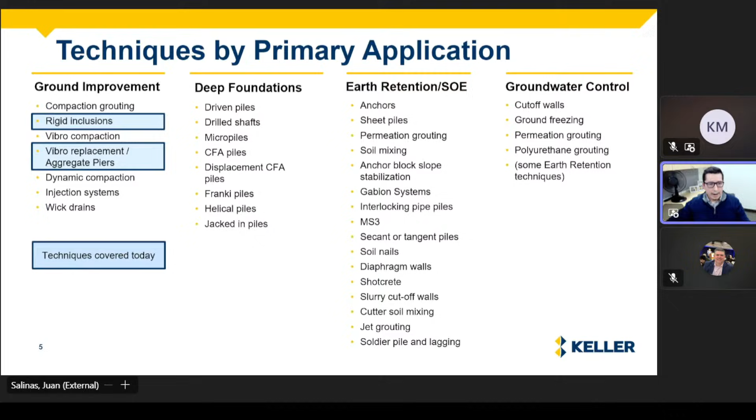So ground improvement refers broadly to techniques that increase your soil bearing capacity and reduce your settlement, letting you design your building as if it were on shallow spread footings. It kind of simplifies the structural design side of things and saves you money because you get smaller footings. These are just some of the typical characteristics of the two products that are the focus of today's presentation. Hopefully most of you are familiar with at least one of these products. They're great for supporting tanks, buildings less than about 12 stories, although Keller has gone higher than that, parking garages, embankments, MSE walls. They're very versatile products, installable in a wide range of geologic settings.

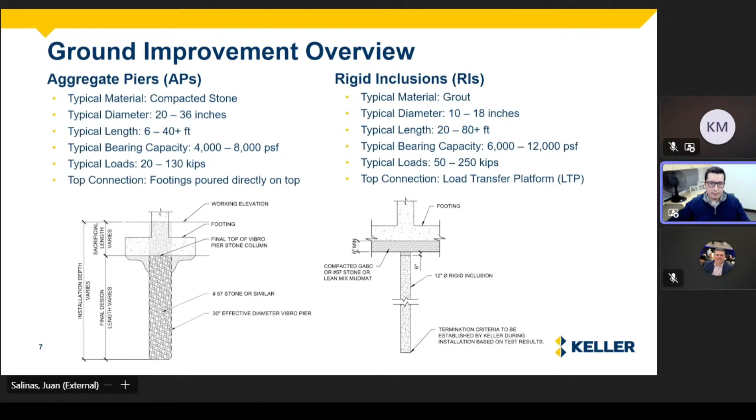I think the most important thing to understand about the mechanisms by which these two techniques improve the ground is that aggregate piers share the load with the ground, and they work with the surrounding soil matrix to improve the engineering parameters. But they rely heavily on that soil to offer pushback and the confinement needed to develop that stiffness as you install them with tamping or vibratory energy. This makes them not suitable for very soft soils or organic soils.

Rigid inclusions, on the other hand, are much stiffer and transfer the load through the soil layers. There's still some load sharing there, but it's less due to the higher stiffness. They're kind of like CFAs, right? Without reinforcement, they're much more like piles in many ways. They are piles, but they're not connected structurally to the building. So you need a load transfer platform, and you need a finite element analysis to understand that interaction between the piles, the LTP, and your rigid inclusions. So there are structural considerations to be mindful of there. But I'll note that the LTP doesn't necessarily have to be any one thing.

It really just refers to the material that occupies the space between the top of your RI and the bottom of your footing, and it can be relatively thin, it can be thick, it can have grid reinforcement, it can be made up of different material types. So it really depends on the application. One of the risks would be that because it doesn't have reinforcement the majority of the time, it has pretty low lateral capacity. It's not ideal in seismic settings, but it can still be installed there if you reinforce it.

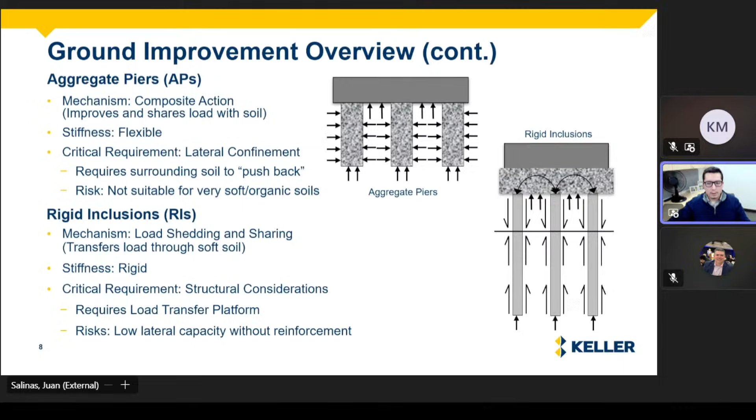Into some stuff, this is the section that hopefully most of you guys are pretty well versed and familiar. But the reason I've included it is just because I get to see a lot of different reports through different areas of the country, and they're not all created equal, right?

So I think first and foremost, we want to understand and identify the geohazards. We want to carefully review the geology information. It's critical that we understand where we are installing ground improvement, and the more data we get, the less risk, right? This is something I'm sure we're all on board with. We really need to think about the number of tests and the depth of testing with respect to the structure footprint and the depth of stress influence, right?

I mention this because I've seen reports where we're doing 15-foot or 20-foot borings for maybe a 5 or 6 story structure, and then we're terminating them in 2 blow silts, right? We don't want to be doing that. That's not particularly helpful. We should consider training our drilling teams, our field engineers, to maybe dynamically adjust our explorations to gather the appropriate amount of information so that we have success with these projects.

And then soil variability, right? Sometimes your footprint is rather large, and I see project reports with only 2 or 3 borings in that building. 2 of the borings maybe are showing pretty consistent conditions, and then you have a third that's showing a dramatically different profile. I think that project probably could have benefited from some additional testing in that transition zone to really understand what is happening on that particular project.

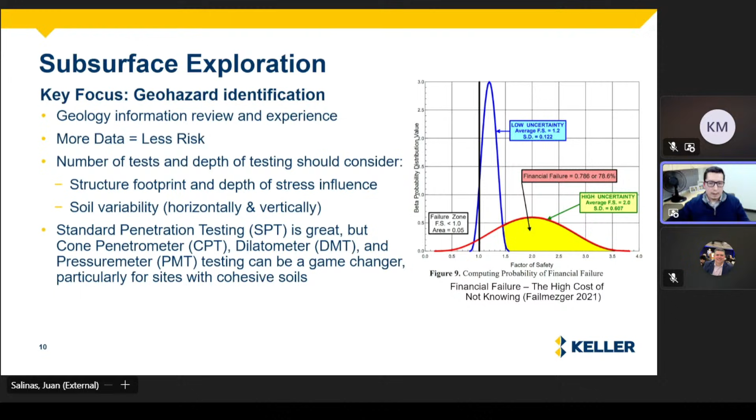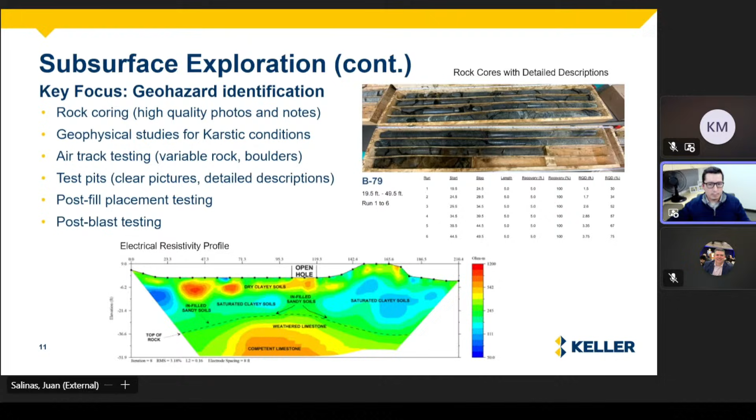This slide just has a couple of more specific types of testing that we would want to do for certain job sites, right? Things like rock coring, geophysical studies, air track testing, karstic conditions and limestone, having really good photos, clear pictures, detailed descriptions. These are paramount to having a successful outcome and an optimized design. We'll see in one of the case studies why I mentioned these things. And things like post-fill placement testing and post-blast testing can also make a substantial difference.

Lab testing, our focus here should be on understanding soil behavior and composition, right? Atterberg limits, moisture contents, grain size are relatively inexpensive ways to gather some pretty good data, to really supplement that information you're gathering from your SPTs. But you'd be surprised how many reports I've seen come across my desk without a single lab test of any kind. I'm talking not a single moisture content. It's kind of shocking because we should all be aware, hopefully, that not all clays, silts, and sands are created equal, right? Even those with equal N value.

And that could be a result of their composition, but also things like their stress history. Testing really needs to be performed at critical layers, which are often found deeper. I have found in my practice, oftentimes, for whatever reason, testing seems to be very concentrated in the upper 10 feet of soil. But sometimes the most important layers to analyze are kind of deeper down. So if you find some weaker layers deeper down, those are good spots to check them.

Things like consolidation tests, direct shear, triaxial for ground improvement—these can make or break a design.

And obviously organics. What I see a lot is qualitative descriptions of organic content—things like this boring has little organics, or some organics, or trace organics. What we'd love to see is a more quantitative approach, because generally speaking, once you cross about 5% organic content, you start to wonder if aggregate piers are even viable for this project. So I'd encourage you guys to do loss on ignition testing and keep in mind that some of the qualitative descriptions may not be as helpful.

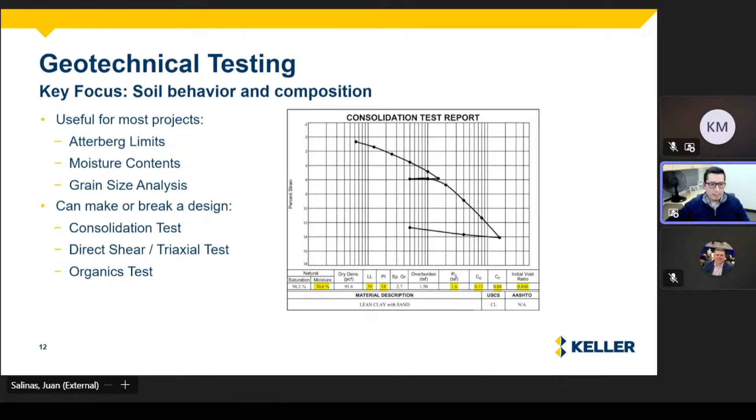I have one slide on structure and design that packs a lot of information, with our focus here being on soil structure interaction and the requirements.

Same thing happens for retaining walls—you need to understand the heel and toe pressures and how those will influence the ground.

The other really important thing is to understand overlapping stresses. There was a project we looked at with very large tanks, 100-something diameter, situated in a line and spaced about 15 feet apart edge to edge. If you plug that into Settle 3D, you'll notice the center tank settles substantially more than the other two, and those two will have some tilting action, with more settlement on the side adjacent to the center tank. That's because of these stress bulb influences. We need to understand that and figure out the impact on anticipated settlement. So that's something to think about.

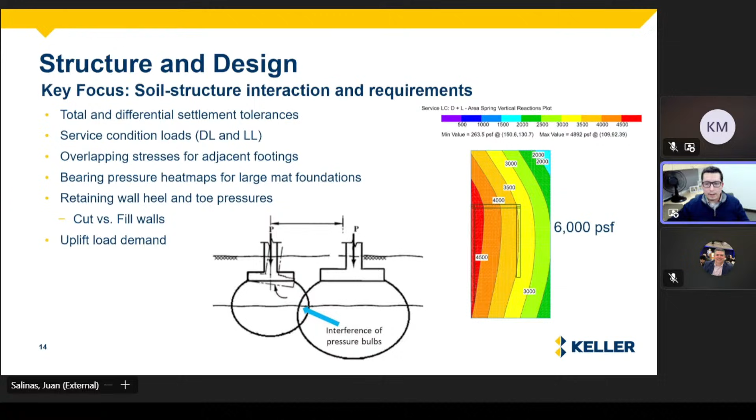With respect to uplift load demand, we don't see these very often for ground improvement. In the limited cases we have seen them, it's worth initiating a conversation with the structural engineer to really understand the requirement, and whether that uplift demand is real or actually a true net uplift demand. We should at least ask the questions.

A couple slides on construction and quality control. Our focus here needs to be on understanding the true site conditions when we go to installation, and keeping communication between all parties involved.

I think a good starting point is your working pad. This has implications even at the design level, and cost implications. Is it one elevation? Is it multiple? Is it sloping? What do your transitions look like? This determines whether our equipment can navigate it safely and efficiently. It also has implications for cost and delaying schedules if it's messy, and we may even shut down if it's too unsafe for our equipment to operate.

So we need to keep it dry and consider using soil cement if you're expecting a lot of rain, things like that.

The other big thing is, we do a lot of work in data centers, and utility coordination is paramount. Having meetings, and the earlier that we start communication about this subject, the better, right? We have a lot more options.

With piers, utilities, and footings, they can be relocated, resized, eliminated, raised, lowered. We can also change the construction sequence, install them first or redesign them, use alternate materials to limit that dig zone you see - it's quite substantial, right? This is a little bit different again because these aggregate piers are going to rely on the surrounding soil for that confinement. We need to limit how excavations are performed in the vicinity of those, which is a little bit different than something like a deep foundation system, right?

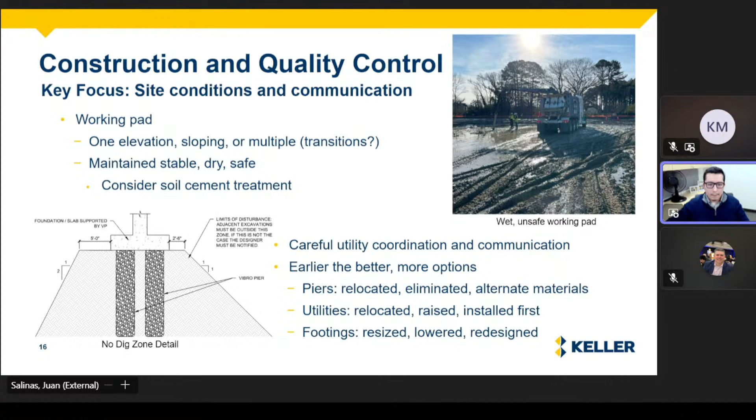The other thing is element installation and tracking, right? So your installation length is equal to your design plus your sacrificial length, and we need to track that carefully. We need to understand, with respect to your working platform, what is that sacrificial portion of the pier that gets dug out as you excavate for your footings - it matters, right? We need to account for that and track it well in projects, especially where you have shallow rock.

That needs to be understood because your design length might be fully compliant with the design intent, even if the pier terminates short of the anticipated elevation, right? We see this a lot in Northern Virginia projects where our design will specifically state that we've accounted for conditions where our piers are going to be slightly shorter than intended.

But oftentimes we find that these get flagged as non-compliant by either third-party reviewers or site inspectors when they're made. So I just encourage everyone to make sure you read through the entire design documents to understand what these specific requirements are there. And then having redundancy really helps with tracking, because we've had cases where our tracking documents will show something different than what the inspectors have on their notes. So redundancy can help alleviate some of that friction.

One of the most important things, and this will be touched on in one of the case studies, is footing subgrade preparation, right? Probing it for stiffness, visually inspecting it, making sure it's dry and well compacted, and then protecting the excavation if you're going to leave it open overnight with a mud mat. Just following the notes on the design and having clear high resolution photos and field reporting. Again, because the piers work and...

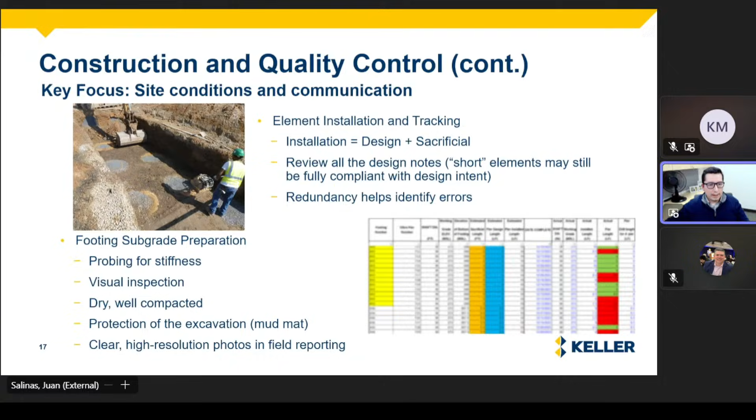Rely on the surrounding soils, it's not enough to just have them, right? That soil matrix could become compromised even if the piers are there, right? So it's important that we take a look at what the footing subgrade looks like when we go to pour the footings. So now we get into the case studies.

The first one is an elevated water tank project here in Virginia. This is in Piedmont geology, kind of along the fall line, which is the transition between Piedmont and coastal plain soils - so your residual versus your coastal deposits. On this project, you have residual sandy silts over partially weathered rock. You'll see a profile on the next slide.

And we're supporting a 1 million gallon elevated water tank designed for 5,000 PSF. This had typical settlement criteria of 1 inch total and 1/2 inch differential, but that should catch your attention, and we'll see why in a minute here.

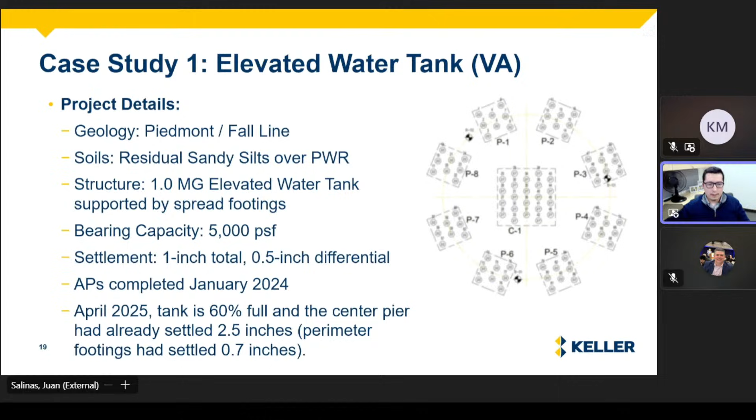This is kind of what the layout looks like. You have a center pier with a 24 by 24 footing, and then all the perimeter footings are about 14 by 14. We completed aggregate piers on this one in January 2024. And in April 2025, the tank is filled 60% full, and the center pier has been measured to have settled about 2.5 inches, although the perimeter footings had only settled about 0.7 inches, give or take.

So this is the soil profile. Here's about where your bottom footing is. Nothing particularly concerning if you just take a glance through that. The N values are not that low. These are 30 to 40% sand, silts.

And the geotech analyzed and made some settlement predictions of totally unimproved conditions, assuming about 1,000 kips. This is higher than the actual loads. I think the actual loads were somewhere in the neighborhood of 900 kips for the perimeter footings and 2,800 kips for the center footing, with settlement predictions in the neighborhood of 1.4 to 1.8 inches, which was pretty congruent with our initial analysis as well.

We also performed a modulus test for the project that showed less than half an inch of deflection at 150% of the load. The perimeter footing settling, 0.7 inches at about 60% of the load, was almost perfectly in line with our expectations.

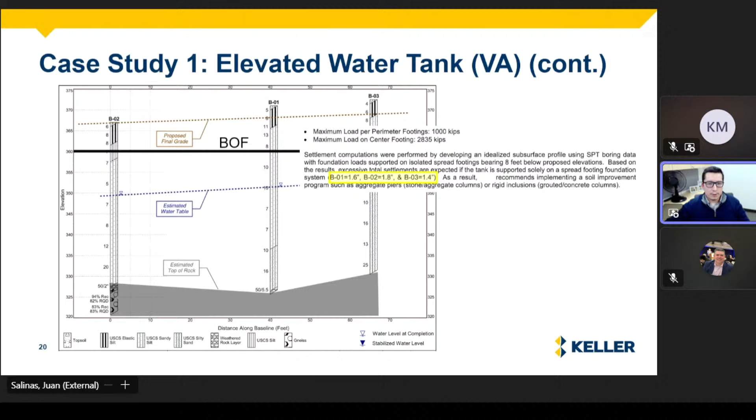So we weren't sure what was happening here. Here's a photo of the subgrade before they poured the footing. It's the only photo available, but to me it doesn't look great at a glance. The photo's kind of blurry and grainy and hard to see. The lighting's not great, but it looks a little bit wet, not exceptionally dry or flat. And the silts in this area, like most silts, are extremely moisture sensitive, right? They lose a lot of their strength when exposed to water.

So we reviewed their records from the inspectors, and there were some missing reports and errors that made it unclear exactly what happened, but they suggested the excavation may have been left overnight. Historic weather data review didn't necessarily suggest a rain event took place, but it was hard to tell.

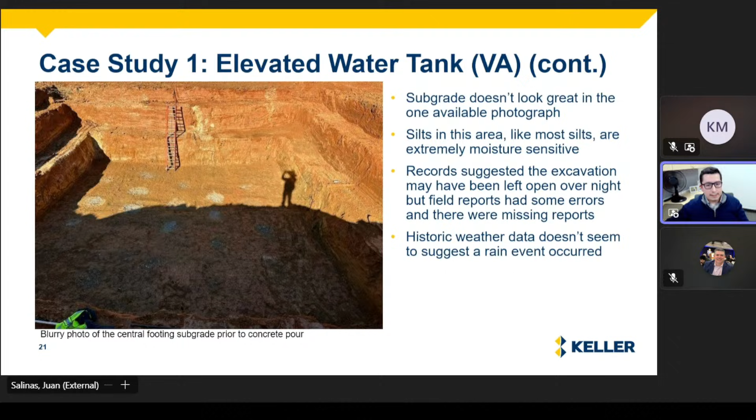So some important lessons learned there. Actual settlement tolerances, total and differential, were somewhere in the neighborhood of 3 to 4 times higher than we were initially told. We found this out over the course of figuring out what the risk is. They ended up having to drain the tank, change the piping connection, jack it up, and then reinstall it. Ultimately, I think all told, the tank ended up settling - the center pier settled something in the neighborhood of about 3 inches, with the perimeter footing settling about the 1 inch we predicted. So a total differential of about 2 inches, and ultimately it was fine with that.

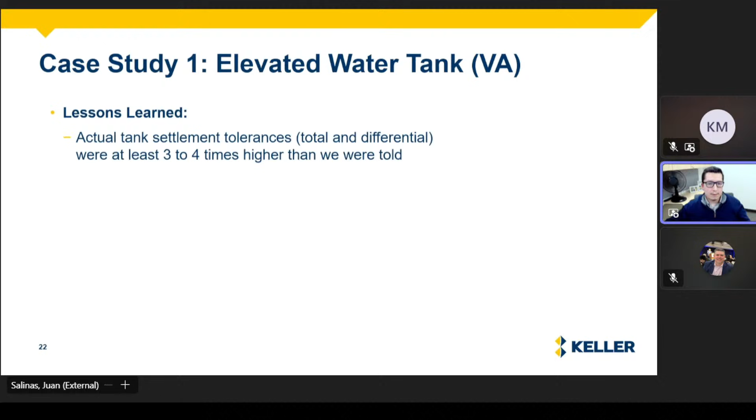So this is what I envisioned the structural engineer might have looked like after he told us that settlement was only 1 inch, or it could only be 1 inch.

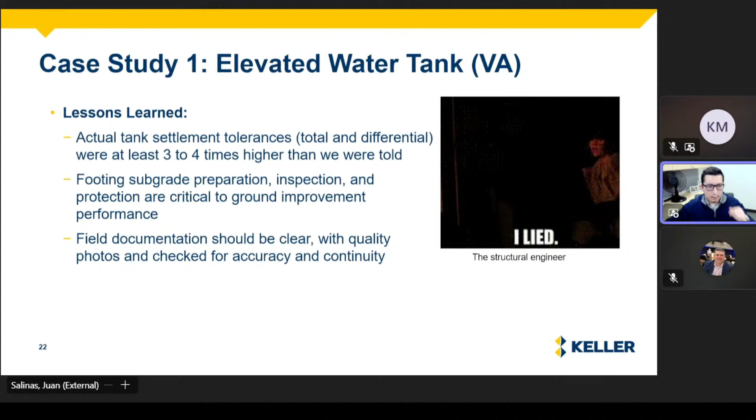Obviously, footing subgrade preparation, inspection, and protection are critical to ground improvement performance - really want to drive that point home. And field documentation needs to be clear, with high quality photos, and checked for accuracy and continuity.

The second case study is the Knoxville building in Tennessee. This is in limestone, karst geology. Knoxville is known for having some pretty variable conditions out there. On this particular project, we have some very soft alluvial clays over rock. It's a 3 to 4 story mixed use building on shallow spread footings, designed size for 9,000 PSF. In reality, the actual loads - the footings don't need anywhere near that capacity for the most part.

There is a large retaining wall running along the back of the building here, and that 9,000 is really concentrated to only one small area of the retaining wall, where the property boundary prevents them from extending their footing out further and reducing that 9,000. But most of the building doesn't actually need anywhere near that much.

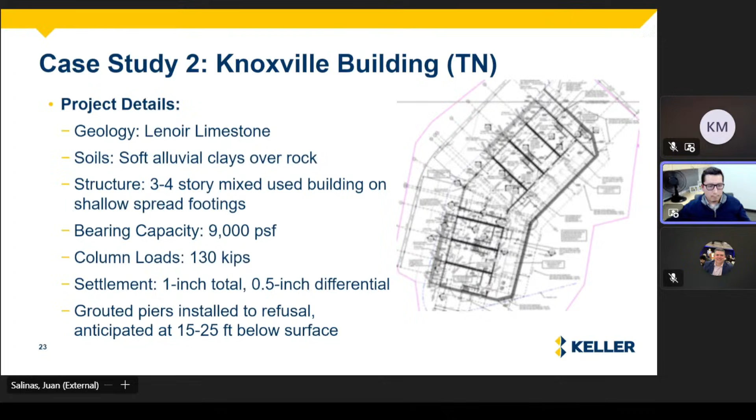Your column loads are only in the neighborhood of about 130 kips, and the typical settlement criteria is 1 inch total, half-inch differential. So we installed some grouted piers to refusal, anticipating that to be somewhere in the 15 to 25 foot below surface range.

But it was pretty clear that we had some subsurface exploration deficiencies. In this karst geology, we had no rock cores, no air track, no geophysical study - we just had basically SPTs, hit refusal, and then stopped, that's it. So half the borings were actually off the building pad, concentrated to one side of the building. When they figured out the final building location, we probably should have had a couple more borings on the other side to have a balanced understanding of what was happening on this building.

And we also had no CPTs, DMTs, or PMTs, or consolidation testing of the clays.

All we kind of knew was that the moisture contents were pretty high, so we really did not expect the clays to contribute much at all. These had to be designed again as almost entirely just pure end bearing elements, assuming that the limestone beneath was pretty sound rock, which it wasn't.

So we had some issues with installation and performance. Some of our grouted elements started plunging into the ground after installation. We could not achieve refusal at some locations, as far as 30 feet down, due to our equipment limitations. So the rock basically was deeper than we anticipated from the available geotechnical information. And our first load test underperformed.

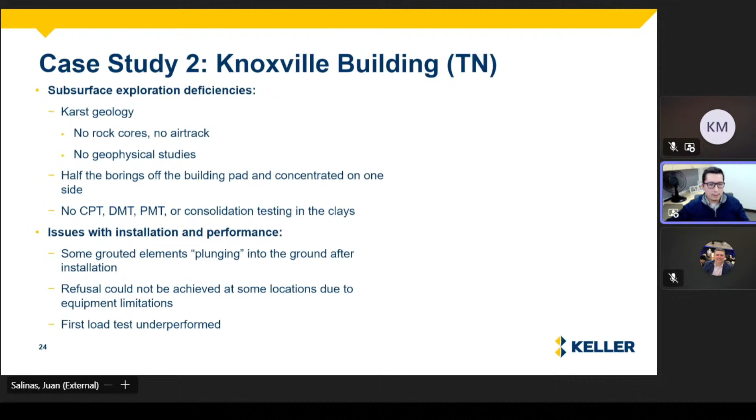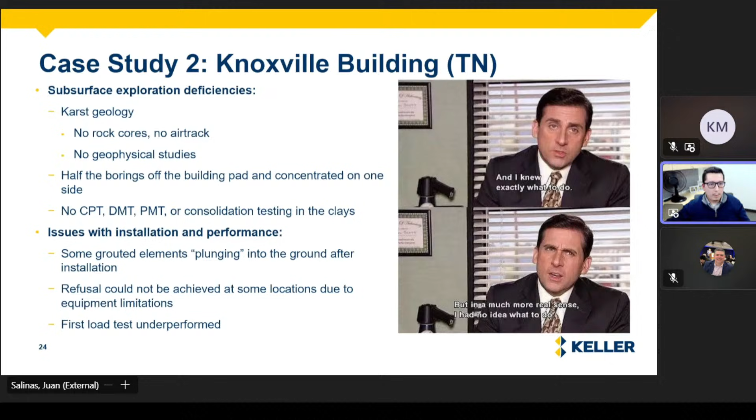I wasn't actually involved with this project initially. It sort of landed on my plate a little later on. And when we started encountering these issues, I sort of knew exactly what to do. But in a much more real sense, I had no idea what to do. So we got with the engineering team, and we came up with a whole bunch of remediation efforts and solutions.

So we directed some rock coring. Obviously, we needed to understand what kind of rock we were looking at on this karst site. And it showed that we had voids and extremely variable rock quality. So we started doing some proof testing of the production elements and got a lower capacity.

We were able to make certain areas, the more lightly loaded portions of the building, work with a lower capacity. We performed additional load tests, one with grouting the voids below the piers and one without. Unfortunately, both tests also underperformed, so we reduced capacity for that as well. The reaction anchors for those tests also continued to confirm that the rock was extremely variable on this project.

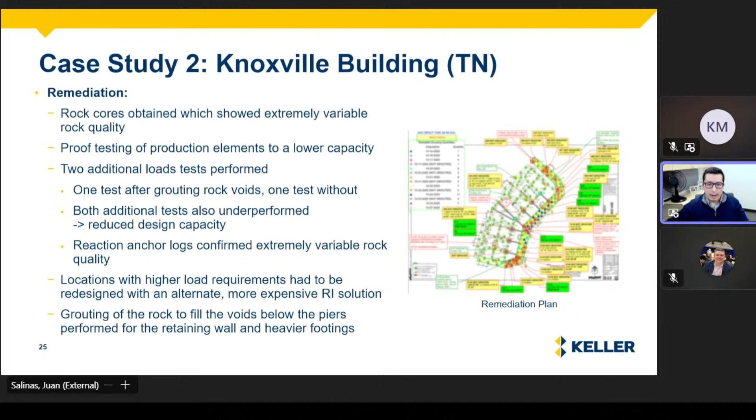At locations with higher loads, we just had to redesign it completely and come up with an alternate solution, and we had to grout the majority of the larger retaining wall area. That was sort of the remediation plan. You can't really tell what's going on here, and that was sort of the point - it's just that it's very, very complicated. Every single element had to basically be analyzed individually.

Lots of good lessons on this one. Proactive, controlled investment in data costs is in almost all cases less expensive than reactive surprise remediation costs. I think this is a very powerful image that kind of captures that sentiment. You kind of know what your geotechnical investment is - it's a defined cost, you know what it's going to be - and you have no idea what your subsurface surprise cost could be.

It's uncapped liability. The other thing on this one that was very interesting was that structural engineers really are very conservative oftentimes. Throughout the course of this project, the actual loading provided by the structural engineer changed, I want to say something like 4 or 5 times. By the end, with the final as-built, some of the footing loads provided from Rev 0 to the final as-built were something like 50% lower than what we were initially told.

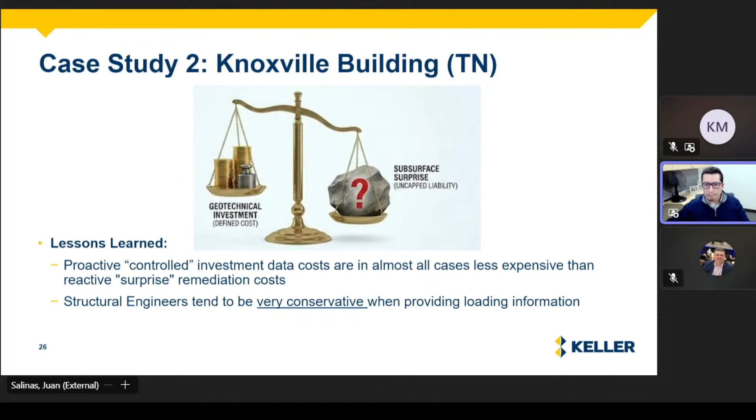Yeah, I don't have an exact number for the total losses incurred on the project as a result of the lack of information and the structural changes, but I know it's somewhere in the neighborhood of double the original cost of the price, not accounting for scheduling delays. And obviously karst is just one of the most challenging geohazards that we navigate.

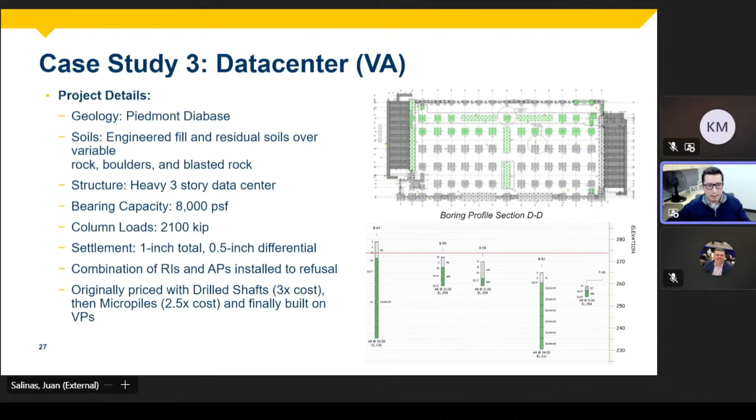Lots of challenges and solutions, right? Boulders, we had to do a lot of air track testing. I think we air track tested every single pier location to figure out whether we were going to be end bearing on something good or a boulder that needed to be removed, and then we reinstalled piers. We had a micropile contingency for certain conditions, which luckily was not needed.

We had utility conflicts, right? And almost all data centers have tons and tons of utilities coming in and out of the conduits. But we have options, right? Again, because of the coordination efforts, we could use different material types to reduce the zones of influence. We can make construction sequence adjustments, so install them beforehand, so they don't need to be dug out after we installed piers. We can move some piers around or resize some of the footings, things like that. So we assisted with BIM model coordination, and we had many meetings about it.

Over blasted rock, we did some post-blast borings, and we required deeper installation. I think the number I was given was something like 30 to 50% change order because of how much more we had to install. They overblasted the rock way beyond what they were supposed to, or what they even really needed to. And then still we had shallow rock refusal in many cases.

So we really needed detailed tracking, right? Some of these larger footings had piers that were installed to length, some that could not be, and we had to make sense of that. So we did a case-by-case evaluation of every footing, what needed to happen there. And that also required quite a few meetings.

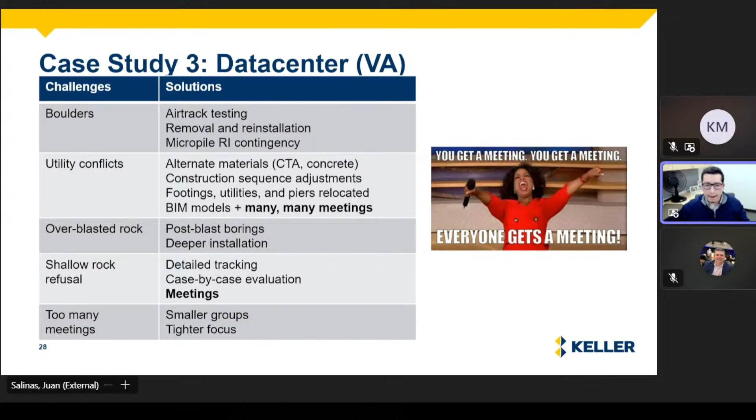APs can be a great value engineering solution in good soil conditions, even for heavier buildings, right? So above the diabase rock, we had very good residual soils, and it made APs possible. Saved a lot of money.

Post-blast borings really need to be performed to determine the extent of possible overblasting on certain projects. I think that was kind of an eye-opening lesson for us. I think sometimes maybe we assume that the blasting is a very precise operation, and it might not be, not necessarily. And the utility coordination efforts are valuable, but they need to be performed efficiently.

That's it. 30 minutes on the dot. Almost. Ready for any questions? Juan, really appreciate that. There's a couple times that having been in this industry for a while that I definitely smiled at some of the lessons learned and so forth. So let's jump right in. I got a couple I want to ask you.

So the first thing I'm going to say is, of those, we'll call them advanced testings, in air quotes, the CPTs, DMTs, PMTs, if you had to pick one, what is the one version of these sort of advanced tests that give you the most return or the best information for your design? I think based on my experience, it would probably be the dilatometer DMT testing. That's been, I think, the most direct measurement of compressibility, which is what we really care about the most. CPTs are probably a close second, just based on my experience. But I'm a big advocate for using DMTs wherever possible.

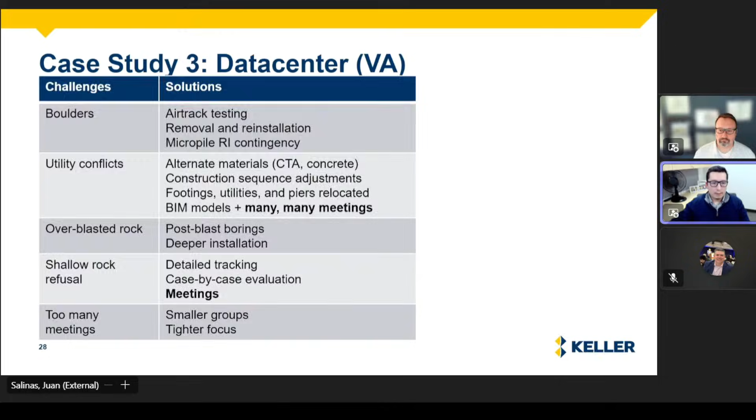And in that analysis, you had mentioned significantly higher center pier settlement. Do you attribute that primarily to the compromised subgrade from the open excavation, or do you think there was some stress overlap that impacted that as well?

We ran a Settle 3D model to see if that was going to be a significant contributing factor. And it didn't look like it was going to be nearly enough settlement to account for it. So our analysis suggested that somewhere on the order of about 0.2 of an inch was coming from that overlapping stress, caused by the perimeter footings on the central pier. So the best explanation I could come up with, based on everything we saw for this particular one, was that the majority of that excessive settlement was happening in just a couple feet of compromised subgrade soils.

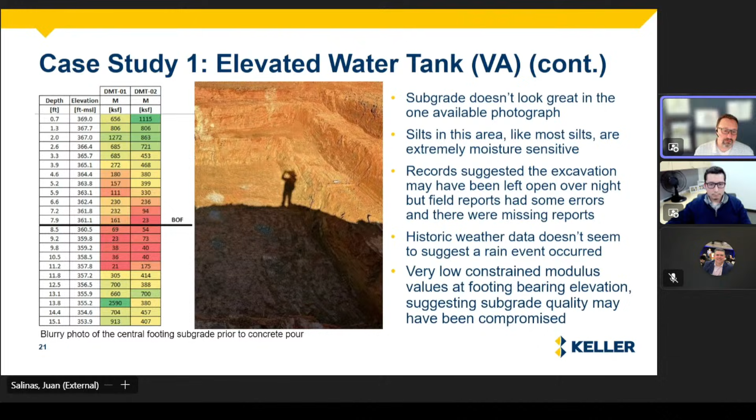And then, as we're talking about all these advanced tests, when it comes to selling that upfront investment to developers, owners, and other engineers, are there points or things that you would typically use to get that over the finish line?

I would also suggest highlighting to clients that may be resistant to making this initial geotechnical investment with some anecdotes - share with them stories of cases where projects really went for the lowest bid and the least amount of information, and it just came back and absolutely bit them. I think that's probably pretty powerful, because people are generally receptive to stories.

It is true that we do seem to respond to stories better. I think certainly those of us in the field have a lot of stories, and being able to share them helps everybody with that. It does take one time getting burned in order for people to learn those lessons.

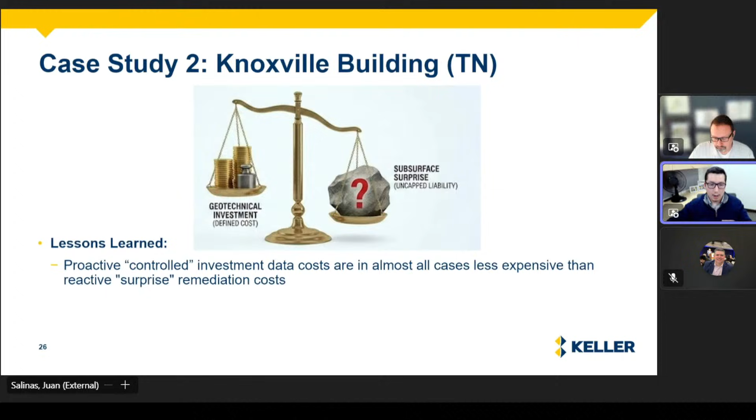I personally have not. I'm positive Keller does that, but I have not had experience with that, unfortunately. I think we're pretty specialized here at Keller, so we've become experts in a couple areas, and we've moved towards this model recently. Our teams are subject matter experts, and I have not had the opportunity to work with jet grouting yet. I hope to someday though.